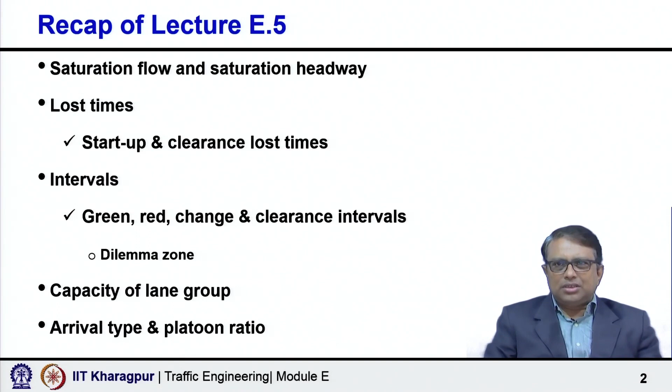Today, we shall talk about performance measures, specifically delay as a performance measure. There are several measures which can be used to describe the level of service or characterize the operational quality for signalized intersections. For example, one possible measure is delay.

Delay refers to the amount of time consumed in traversing the intersection, and generally indicates the difference between the arrival time and the departure time, where these may be defined in a number of ways. So conceptually you know what delay is, but there are many ways delay can be quantified and considered to measure the level of service at signalized intersections.

Also, queuing is another measure - the number of vehicles forced to queue behind the stop line during the red signal phase.

We may also consider volume to capacity ratio, a very important measure, because it indicates the degree to which a phase's capacity is utilized by a lane group. So different types of measures related to delay, queuing, volume to capacity ratio are all possible measures to define the level of service or characterize the operational quality of signalized intersections or lane groups.

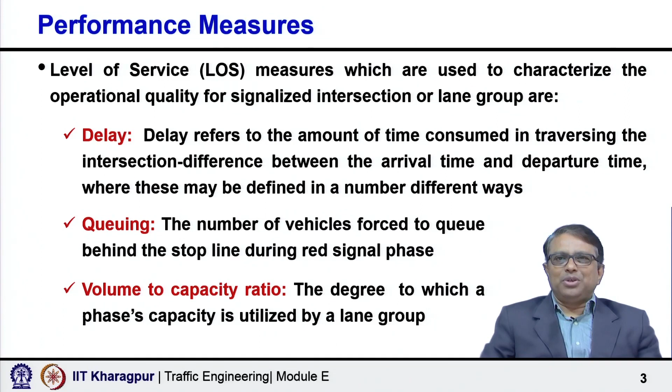Among all these measures, the most important and widely used measure is delay. So now, in the subsequent part of this lecture, we shall discuss specifically delay as a measure of performance.

There are different types of delays. For example, one is the stop delay, we can also use approach delay as a measure, and travel time delay is also another possibility. Let us look at this plot I have shown.

It is a time-distance diagram. The solid red line with a constant slope, as you follow my cursor movement, indicates when vehicles are arriving and crossing the intersection during green. So correspondingly this time is basically the green time.

Then this is amber, followed by red. Now, when green is over, amber is introduced, the flow rate will decrease and eventually the vehicle will come to a stop - shown through this yellow segment - and then the red phase starts. So the signal is red.

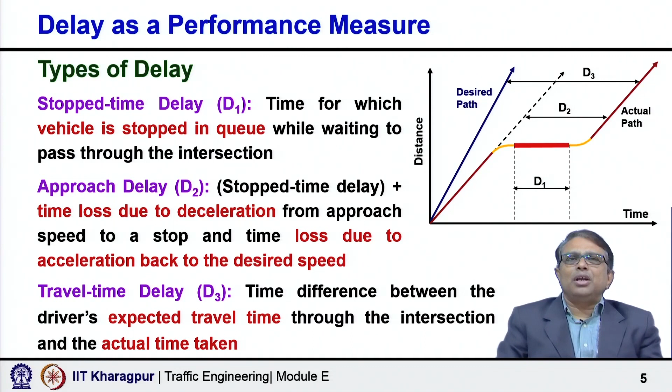Now, coming to the theoretical modeling of delay. Depiction of arrival and departure at a signal shows that you can actually estimate all three critical parameters, namely: total time that a particular vehicle spends waiting in the queue, the number of vehicles that are queued at any time t, and also the aggregate delay of all vehicles passing through the signal.

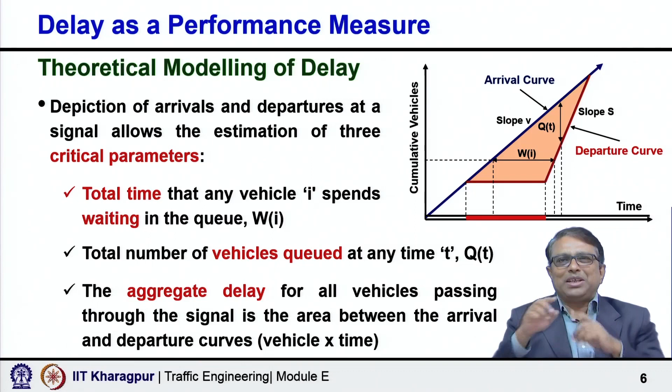Now, from the plot of vehicle arrival in queue and departure from queue, the model closely represents actual time in queue delay, that is W_i. That is what we can calculate. Now, there are certain basic assumptions considered for this plot.

First is uniform vehicle arrival. At a completely isolated intersection, actual arrival would be random, and inter-arrival time would actually vary around an average rather than being constant. But what we are considering here is uniform vehicle arrival, where the headway, the time gap between arrival of two successive vehicles, is constant. In reality it will not be constant, because it will be random and the actual arrival times would vary around an average rather than being constant, but that is the assumption here.

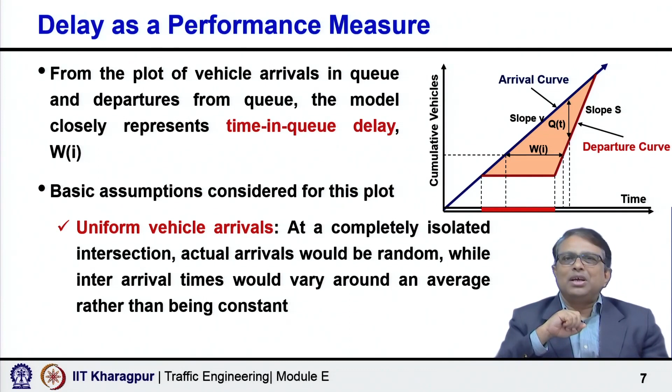That is one assumption. There is a second assumption implicitly, that the queue builds at a point location as if vehicles were stacked on top of one another. But what will happen in reality? As the queue is growing, vehicle arrival rate at the end of the queue is the arrival rate of vehicles at a point, plus a component representing the backward growth of the queue in space, because the queue is growing, going back. If 10 vehicles have arrived, then the queue has gone back by 10 vehicles.

Now, coming to different delay scenarios, depending on how the arrival is happening and how the discharge can happen for a given intersection, there could be several delay scenarios based on whether it is stable flow, whether it is individual cycle failure within a stable flow or stable period, or whether demand exceeds capacity for a significant period.

The first one is stable flow, meaning there is no cycle failure. Every individual cycle, whatever vehicles are arriving at the intersection approach, all those vehicles can be cleared in every cycle.

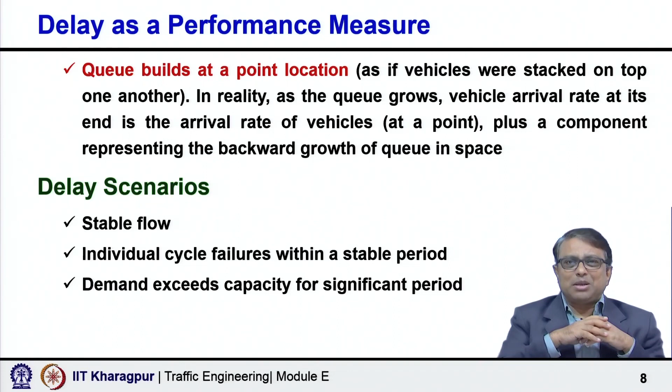So if we want to represent stable flow, as you can see here, it is red and green, red and green. One is the arrival function, showing cumulative vehicles, and another is the departure function. What is really happening? The arrival and departure functions are the same here.

Once the red starts, it deviates; the arrival function and departure function become different, vehicles are waiting, stop delay is happening, and at the end of the red, the departure starts happening, and overall the arrival and departure rates are such that within the green itself, the red line goes back and meets the blue line again. So in every cycle, the red line and blue line are meeting back, joining back. You can see all these small triangles created due to the stopping of vehicles during the red. Ultimately, the red line is every time joining back to the blue line.

That means the cumulative discharge and cumulative arrival are equal. Discharge is able to pick up the cumulative arrival, indicating that there is no vehicle in the queue when the signal, or the green time, ends.

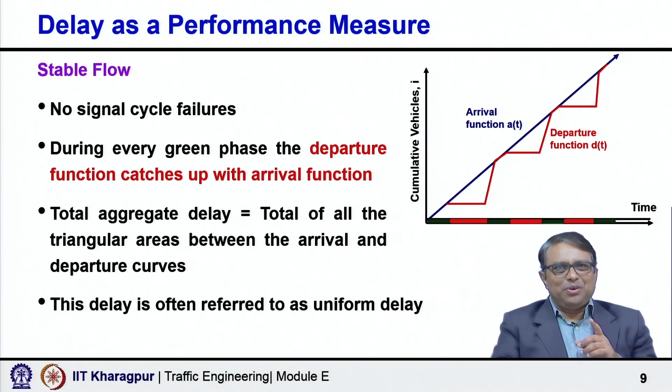Now, as you can understand, there are different components of delay. One is the uniform delay, assuming uniform arrival and stable flow with no individual cycle failure. So, the vehicles are arriving following this pattern, uniform arrival, first vehicle to second vehicle, second to third, third to fourth, fourth to fifth, the time gap is exactly same. It is not a realistic assumption, but that is what is the assumption. With that, and no individual cycle failure, whatever delay you are getting, we call it uniform delay.

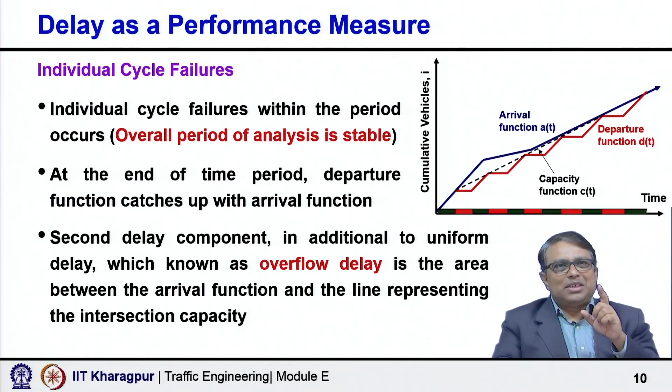That means the additional delay that occurs when the capacity of an individual cycle, phase or series of phases is less than the demand or arrival flow rate. What we said has this scenario and also the previous scenario. This is the individual cycle failure case, and this is the cycle failure case for a significantly longer period, where multiple cycles are failing.

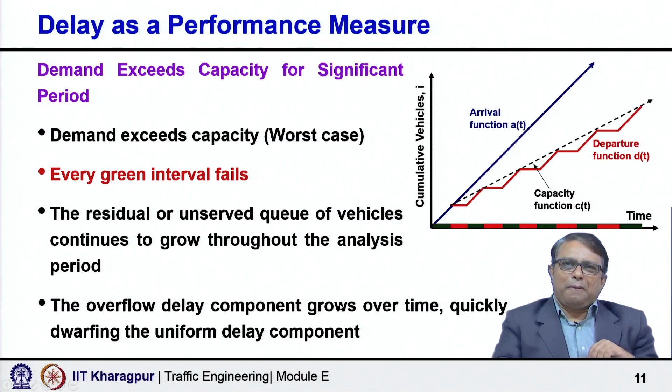So, uniform delay, random delay. Uniform delay is with the assumption of uniform arrival and no individual cycle failure, so no overflow delay in this case. Random delay is only a further adjustment considering that arrival is not uniform, and whenever either for individual cycles or over a significant period of time the demand exceeds the capacity, then the overflow delay will come.

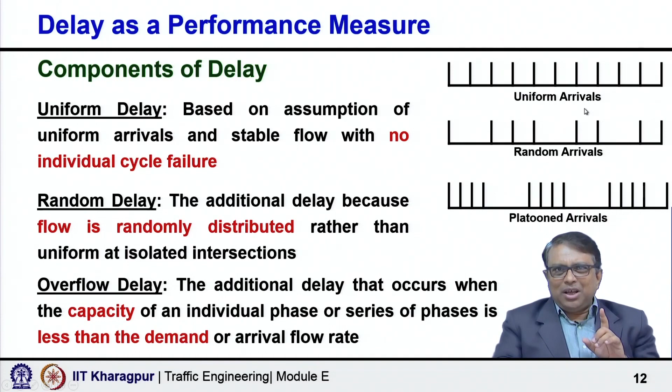Now, there is also another model which is for the calculation of random delay. Now, this random delay, why is it called random delay? I have explained it, because the arrival is not uniform. So, there will be additional delay. So, that component of delay you can calculate using this formula. Carefully observe that here is the term in the denominator, 1 minus x.

What is x? X is the V by C ratio, or degree of saturation. I have mentioned about degree of saturation earlier, right. So, what does it indicate? If the degree of saturation is 1, the random delay will be infinity as per the model, which is not very realistic. Now, this formula somewhat overestimates the delay.

So, Webster proposed that the total delay will be how much? Uniform delay plus random delay. Random delay is only because of that reason that arrival is not uniform, it is random. So, uniform delay plus random delay together will be the total delay. And what Webster said is let it be 0.9 of that summed or summation of delays, because otherwise it a little bit overestimates the delay. So, let us take 0.9 into uniform delay plus random delay.

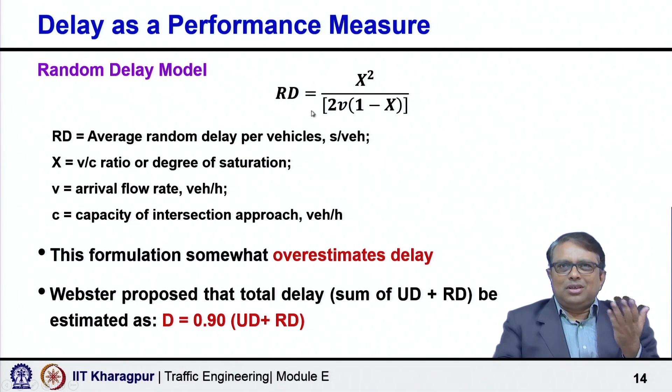So when V/C ratio is less than 1, there is no overflow delay, because overflow is not there in this case. There is no question of overflow delay generally, but as per the model, the random delay increases asymptotically to an infinite value as the V/C ratio approaches 1. So it is going to be almost infinite.

When V/C ratio is 1, the overflow delay is theoretically 0, and as V/C increases further, the overflow delay increases uniformly. This is as per the overflow delay model. So if you take up this model, that is what you get - beyond 1, it increases almost linearly, uniformly increasing.

So neither model is accurate when V/C ratio is around 1, because the delay does not become infinity when V/C is 1. If you take the random delay model, it says the delay will be almost infinity when V/C is 1, which is unrealistic.

Similarly, there is no true overflow delay with V/C ratio at 1, but individual cycle failures do occur due to random arrivals - because with uniform arrival there would be no cycle failure, but even when V/C is 1, cycle failures occur due to randomness, though the overall period is still stable. So the overflow delay of 0 is also unrealistic.

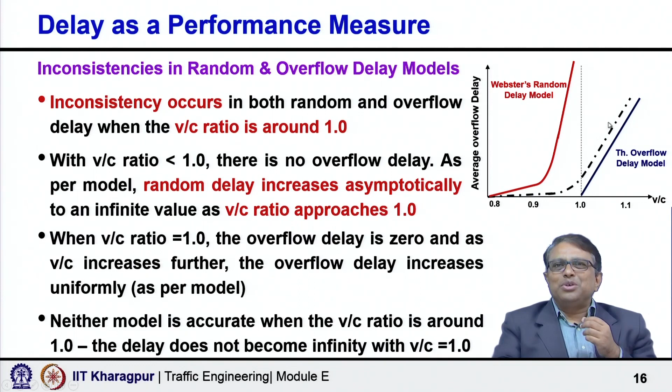If I go back and show you, you can see here is a dotted line. As per Webster, the random delay model shows infinity when V/C is 1, and the theoretical overflow delay model shows 0 at V/C equals 1, but neither of these is true. You can see it combines, and the dotted line tries to predict something more realistic than these two models. That is why the model developed by Akcelik is commonly used to bridge this gap.

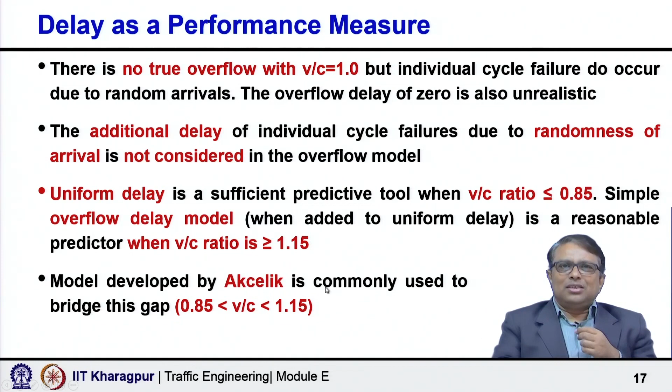Now, this is the model given by Akcelik, and I need not explain this model again - you can see that I have given it here.

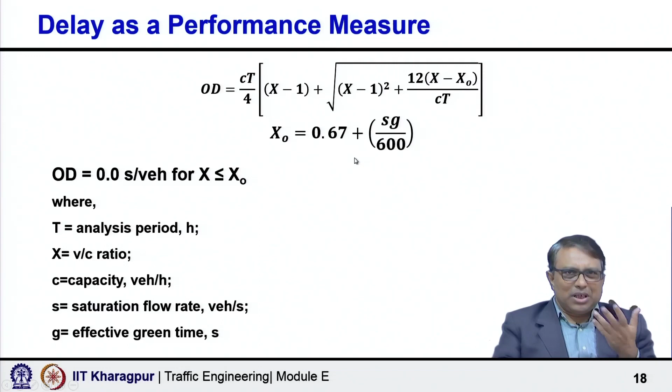Let us take an example that an intersection approach has an approach flow rate of 1100 vehicles per hour, a saturation flow rate of 2900 vehicles per hour, cycle length 90 seconds and G by C ratio of 0.6. What is the average delay per vehicle expected?

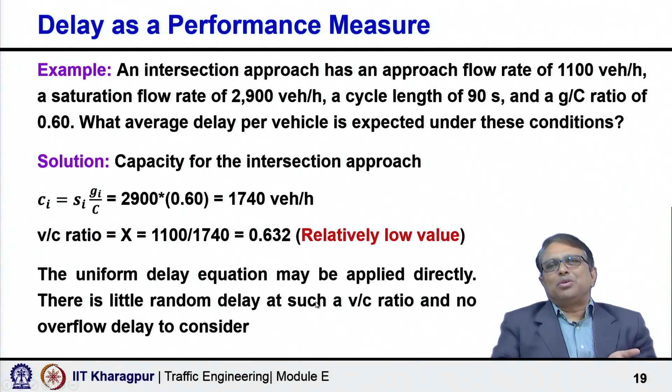Now, obviously, you can calculate the capacity, saturation flow into effective green time by cycle time. So 1740, V by C ratio you can say 0.632. Now, 632 is relatively low value, as I said that up to 0.85 the uniform delay model is quite good. So we apply simply uniform delay model and no need to consider overflow delay or random delay. So you simply calculate it using Webster uniform delay model and you calculate it. It is 11.6 seconds per vehicle.

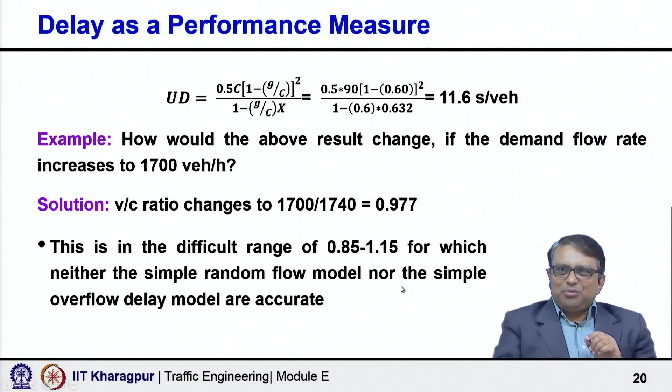Now, how would the above result change if the demand flow rate increases to 1700 vehicle? Now, in that case the only change will be the V by C ratio. So V by C ratio will be now 0.977, very high. So it is a problematic range. Neither the random delay model nor the overflow model as given earlier can work. So this is the difficult range for which neither the simple random flow model nor the simple overflow model are accurate. So what we will do?

This is the case where we should use actually the Akcelik model. So the Akcelik model is applied, you can see the detailed calculation later and accordingly the delay is calculated.

Now there is also one more very important concept, the control delay. Control delay represents the average delay experienced by all the vehicles that arrive during the analysis period, and it even includes any delay incurred by vehicles that are still in the queue after the analysis period, because you are considering all the vehicles for the analysis period. So even if the analysis period is over, but some of the vehicles have still not cleared the intersection, the delay is still happening. So you have to continue the analysis that way beyond the analysis period.

So that is what you see, it represents average delay experienced by all vehicles that arrive during the analysis period, but all vehicles may not be able to clear the intersection during this analysis period, yet I want delay for all those vehicles which have arrived during the analysis period. So I have to continue the analysis, continue the measurements, whatever you say, the delay which will be incurred by the vehicles that are still in queue after the analysis period ends, because they have not cleared the intersection.

The control delay for a given lane group can be computed using 3 components: D1, D2, D3. D1 is the uniform delay, D2 is the incremental delay, and D3 is the initial queue delay. Now the incremental delay, first part is straightforward uniform delay.

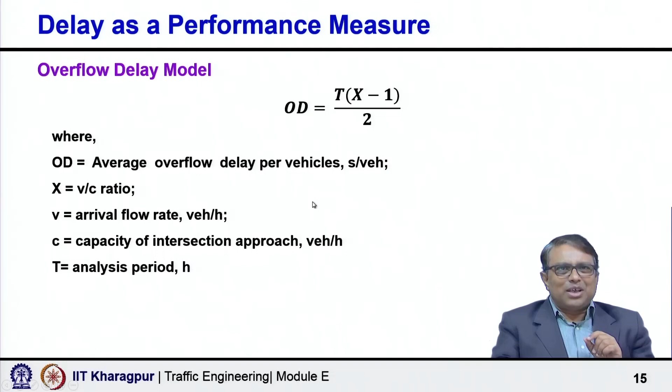The incremental delay actually consists of 2 delay components. One is the overflow delay, that is due to the effect of random cycle by cycle fluctuation in demand that occasionally exceeds capacity. Go back to this scenario, somewhat similar to this, we are saying that kind of individual cycle failure, sometimes it is happening. So that condition also can be taken care of.

And also the second one is delay due to sustained oversaturation during the analysis period, where actually the overflow is there for a significant period of time, overflow delay is there. That means over a longer period of time also the demand is much higher than what probably can be discharged through that intersection approach.

Third, D3 is the initial queue delay that accounts for additional delay incurred due to an initial queue, and this queue is a result of unmet demand in the previous time period. Overflow is there, so it is the delay for vehicles which could not be cleared, the queue is the result of unmet demand in the previous analysis period.

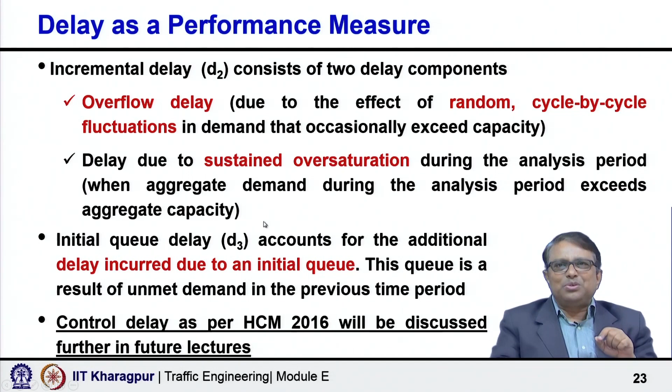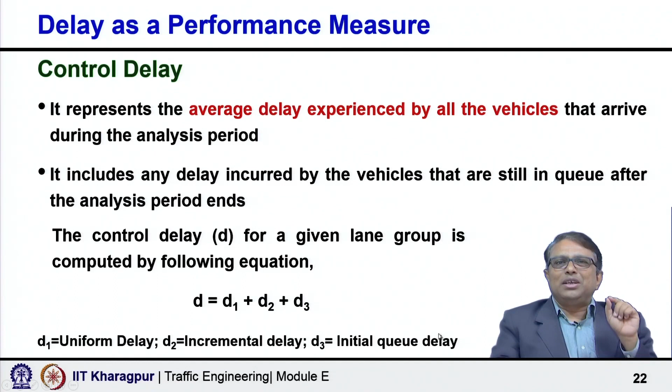Now, I shall come back to you with a lot more discussion about the control delay in subsequent lectures. So this is very important. We just introduced you to this concept of control delay at this stage and telling that there are 3 components of control delay: one is uniform delay component, incremental delay component and initial queue delay. So with this we close.

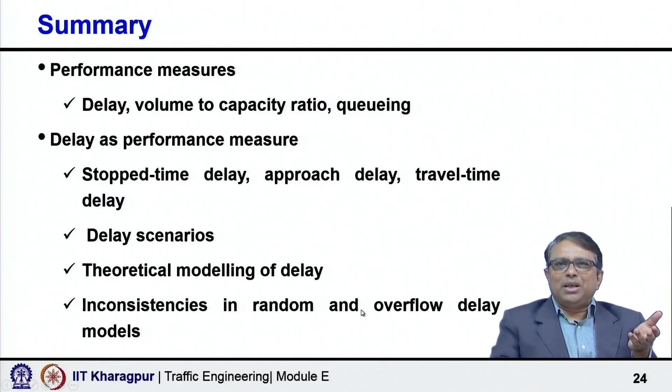So what we discussed today is about initially various performance measures, delay, volume to capacity ratio and queuing. Then subsequently discussed about stop time, approach delay, travel time delay, also various delay scenarios, theoretical modeling, also discussed about the inconsistency in the random and overflow delay model and how this can be overcome by the Akcelik model. So with this I close this session. Thank you so much.